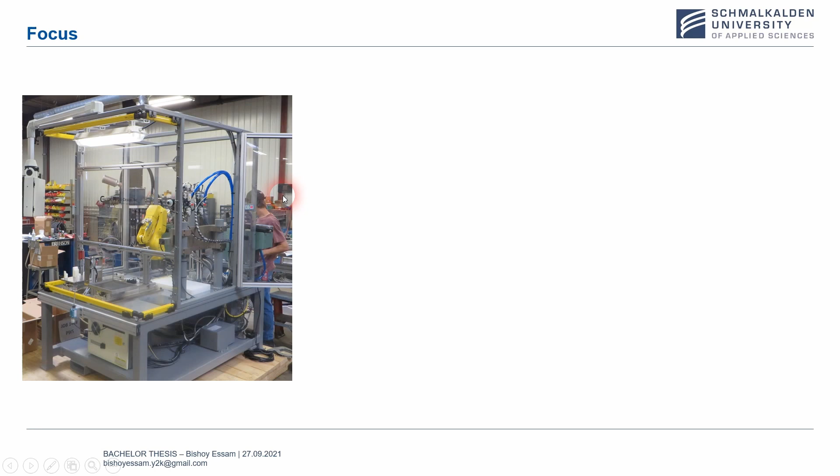To begin, I would like to discuss the focus of this thesis, which tries to solve the problems we see in this picture, where in most typical industrial environments we have a robot isolated in a cage away from the human worker, with no cooperation between the two. The aim of the thesis is to enable human-robot collaboration, and of course not just collaboration but safe collaboration. This is the desired situation we see here, where the human worker collaborates with the robot in a certain task.

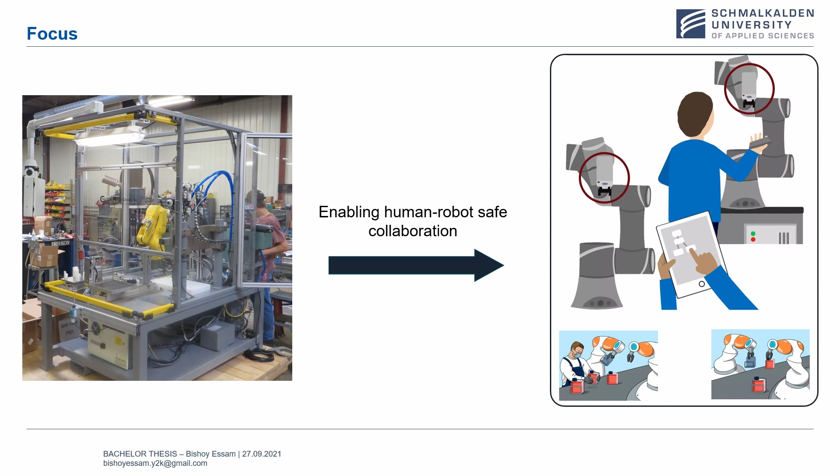Usually this task requires the flexibility and creativity of the human worker, and at the same time the precision and repeatability of the robot. We can see here the robot uses these cameras in order to perceive its environment and locate the human and so on. The big challenge that usually lies in this situation is the control problem.

If we imagine we are using a classic controller, this controller can be a PID controller, for example, where we have a reference here and an error signal, and the classic controller tries to drive the robot towards this reference via this control input.

We can see that this classic controller does its job quite well until there is a human in the environment. So if we have a human in the environment, the robot can collide with this human, and of course this is very dangerous when it comes to human-robot collaboration.

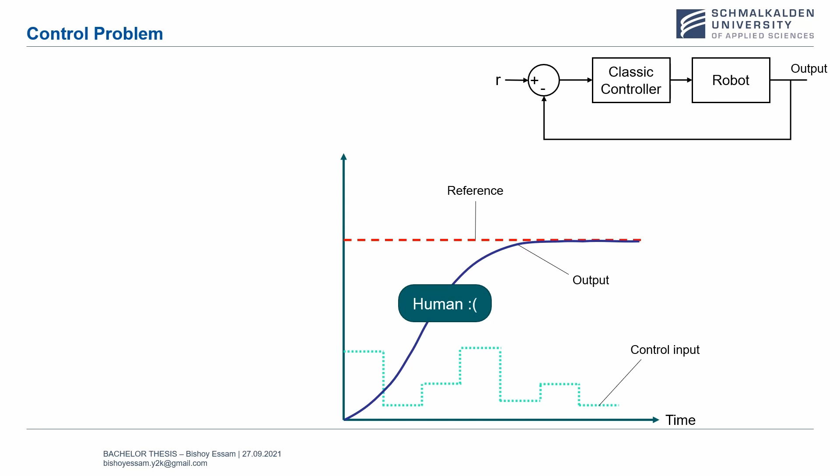We would like to have a desired controller that does the following: at a certain moment in the present, it can plan the path for the robot in the future, so that this robot can follow this path and avoid the human, and at the same time reach its reference at the end.

So the desired controller, using image processing and the desired reference, would plan the path for the robot, and at the same time plan the control input in the future that will achieve this path in order to avoid the human and reach the reference.

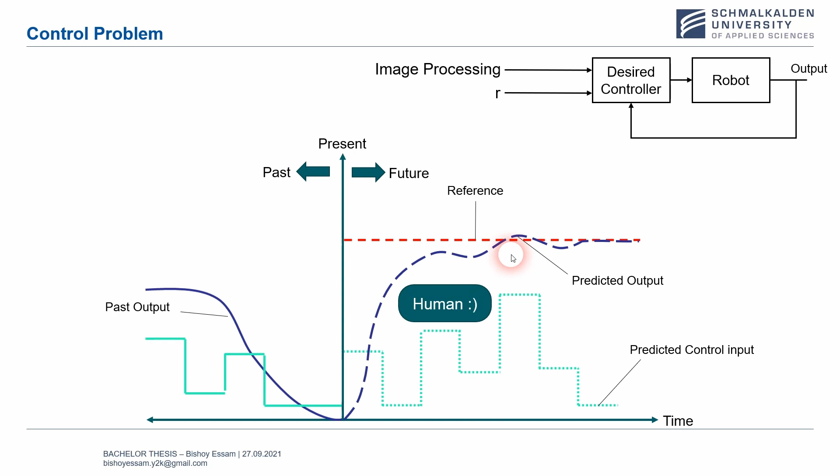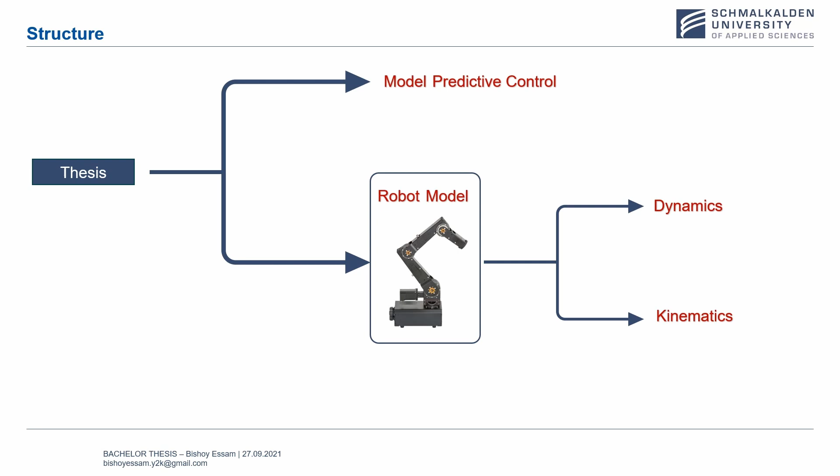And actually this controller exists, and it's called Model Predictive Control. But as you see from the name, this controller uses the model of the system in order to achieve its job. So first we have to formalize a complete robot model in order to be used by the Model Predictive Control. A complete robot model consists of a dynamic model and a kinematic model, and the kinematic model consists of forward kinematics and inverse kinematics. I would like to discuss with you more deeply the forward kinematics.

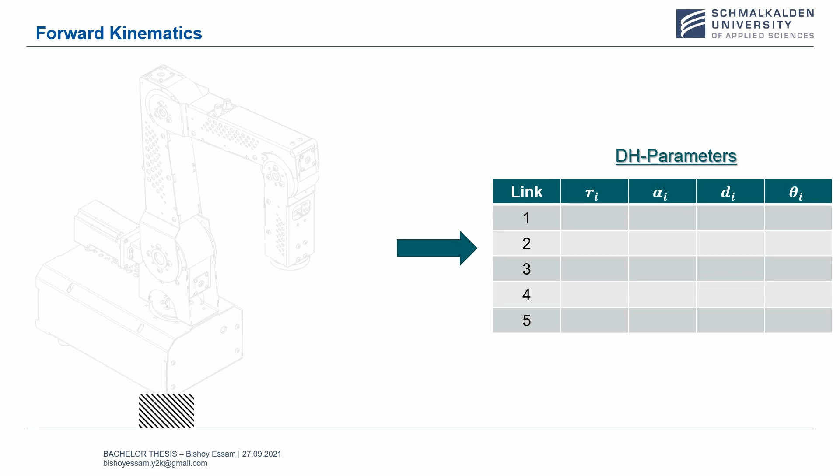This is our IGUS robot that is present in the robotics lab at the university. This robot has 5 degrees of freedom, meaning it has 5 joints, and these joints are structured in the following way.

The forward kinematics answers the following question: knowing the angle of each of the 5 joints, what is the position of the end effector in the Cartesian space? By Cartesian space I mean x, y, and z coordinates, because the end effector has these 3 coordinates. But how do we obtain this position in Cartesian space, knowing the angle of each joint, and also not only the position of the end effector but also its orientation, because the robot can achieve the same position in space but with different configurations.

So this resembles the orientation, and forward kinematics typically answers this question.

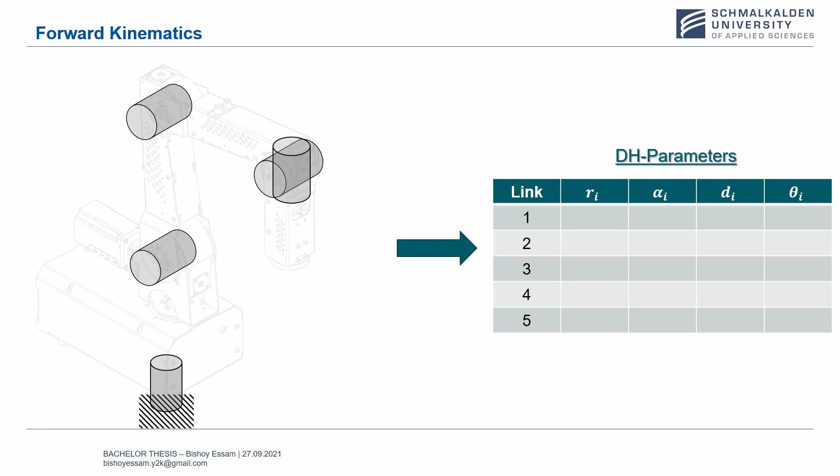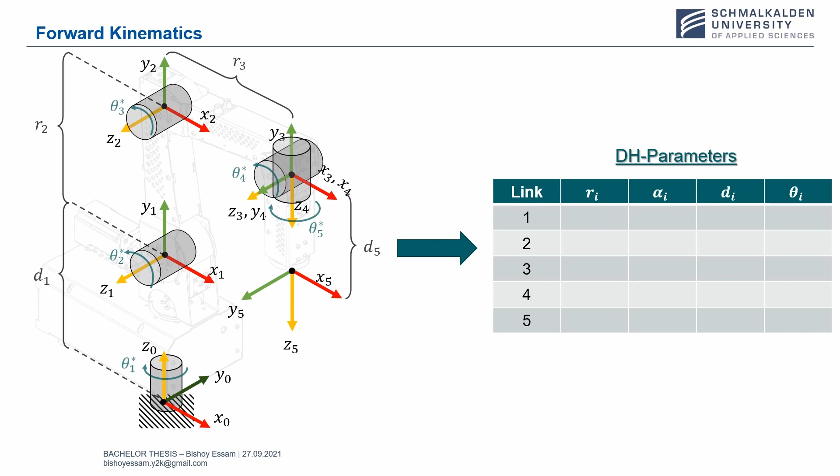Forward kinematics is obtained by following a systematic way called the DH convention, or Denavit-Hartenberg convention. This systematic way starts by constructing coordinate frames at each of the joints. So these are my coordinate frames. After that, we have to obtain what's so-called the DH parameters, and these parameters are typically the geometric relation between each of two successive coordinate frames.

In order to illustrate the meaning of these parameters, let's focus on link 1. Here is my link 1 that starts from the joint, from coordinate frame 0 to coordinate frame 1, and we have coordinate frame 1 attached to link 1, but frame 0 is not attached to link 1 because it is attached to the base, so it is the inertial frame.

Let's begin by looking at the R parameter. R1 is for link 1, and R1 is the distance between Z0 and Z1 along the x0 axis. You can see here that Z1 and Z0 lie in the same plane, so there is no offset in the x0 direction, and that's why R1 is equal to 0.

The next parameter is alpha1, and alpha1 is the angular distance between Z1 and Z0 along the x0 axis. We can see here that Z1 can be obtained from Z0 by a 90-degree rotation about the x0 direction. That's why here we have alpha1 equal to pi over 2.

D1 is the distance between x1 and x0 along the Z0 axis, and this distance is basically the link length. And finally, the last parameter is theta1, and theta1 is the angular distance between x1 and x0 along the Z0 axis.

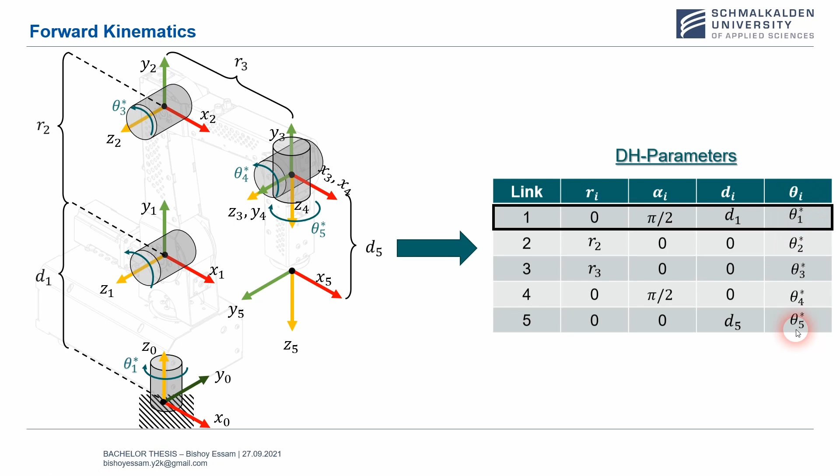Once we have the DH parameters, we can construct what's called the homogeneous transformation. The homogeneous transformation AI is a transformation matrix that relates frame I with frame I minus 1. Here the C and the S denote cosine and sine, so C theta is cosine theta, and S theta is sine theta, and so on.

We can see that this matrix is a function of the DH parameters of link I, so the matrix AI is a function of Ri, alpha I, Di, and theta I. Due to the fact that theta I is not constant, it is a joint variable, this matrix changes by changing theta I, so it is a function of the joint variable.

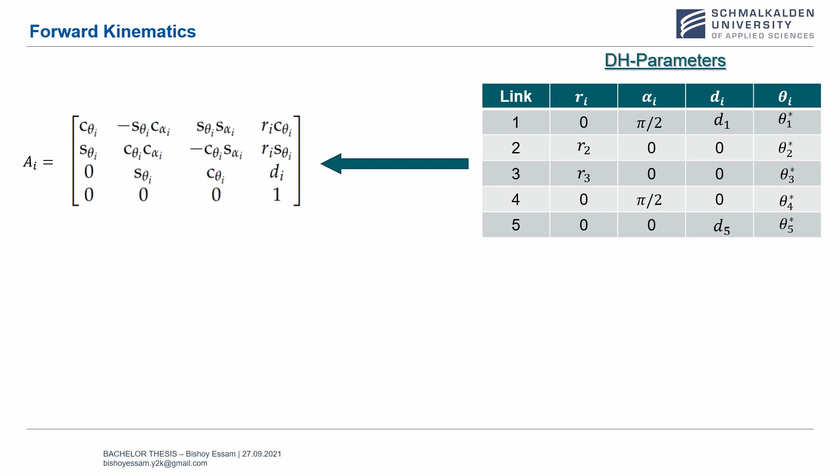After constructing the transformation matrix for each link, we multiply these transformation matrices by each other to obtain the final transformation matrix that relates the end effector position and orientation to frame 0, which is the inertial frame.

Generally, any transformation matrix is an augmentation between two parts. The first part is this 3x1 vector, and this is the position of the end effector in the case of the final transformation matrix. So this is the x coordinate, this is the y coordinate, and this is the z coordinate of the end effector.

Again, the C and the S are for cosine and sine. For example, C23 is cosine of theta 2 plus theta 3.

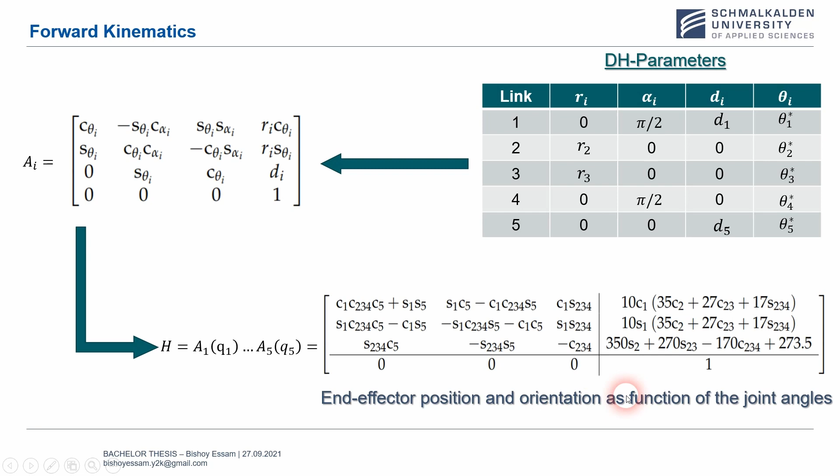The other augmented part is this 3x3 matrix, and this denotes the orientation of the end effector with respect to the inertial frame. We can also see that it is a function of the joint variables, because each of theta 1, theta 2, theta 3, theta 4, and theta 5 are not constant. They change by changing the joint's angle, so this final matrix is a function of the joint variables.

So by that we finish the forward kinematics, and the other part of the kinematic model is the inverse kinematics.

And the inverse kinematics does quite the opposite, which is knowing or having a desired orientation and position of the end effector. We would like to know the angular position of each of the joints that would achieve this desired position and orientation of the end effector.

By formulating the forward kinematics and the inverse kinematics, we are done with the kinematic model. And by the way, there is also a kinematic model for the velocity of the end effector, where we address the same question but for the velocity in this case.

So for example, the forward kinematic model for the velocity of the end effector is the following: if I know the velocity of each of the joints, what is the velocity of the end effector in the Cartesian space? This is the kinematic part, and the dynamic part is concerned about obtaining the differential equation of the robot that governs its motion in response to external torques and forces.

For the time duration of this presentation, I think it's enough talking about the robot model. If you have any question, of course you can email me regarding any question about the illustrated part of the forward kinematics, or if you would like to know more about the dynamics or the inverse kinematics. And now I think it's better to talk more about the model predictive control.

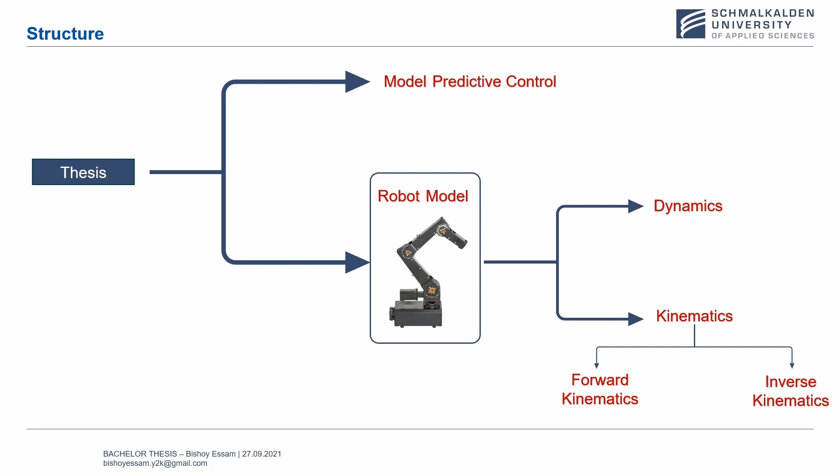So let's imagine we have the following control problem, where we have an initial position for the robot and a desired position of the robot, and we need our model predictive control to plan the path and guide the robot along this path, and at the same time avoid any obstacles that lie along this path. This obstacle can be an object, or it can be the human in our situation.

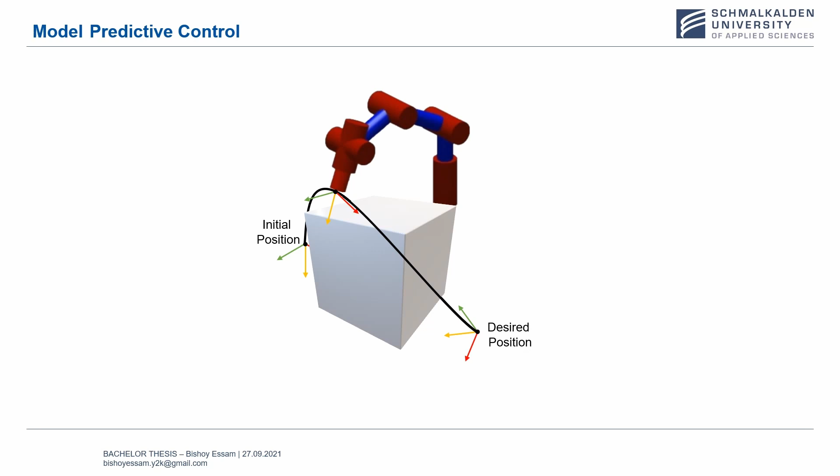As I said, the model predictive control uses this dynamic model in order to predict the future behavior of these states, and this future behavior depends on the predicted control input in the future. So by choosing different control inputs, we would have different future behaviors. So how does the model predictive control choose the right control input in order to derive a correct output for the system?

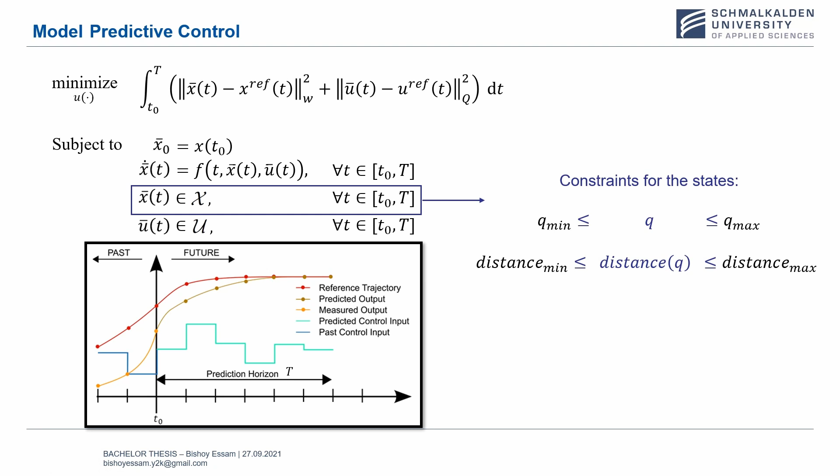And also we can have constraints over the inputs, and in this case the inputs are the torques, and we can have a constraint over the torques in order to lie within a minimum and the maximum value.

So the big picture of how model predictive control works is that at the current instant, at t0, the model predictive control tries to choose an optimized input trajectory in the future that minimizes a cost function, and at the same time the predicted output resulting from this control input should follow certain constraints defined by the user, and the control input also follows a set of constraints.

After achieving this calculation, the model predictive control applies only the following control input to the plant. This control input is applied, and then the whole calculation is repeated again in the following sampling time. Of course the prediction is achieved for a finite amount of time called the prediction horizon, because the MPC cannot predict the future of the system for an infinite amount of time.

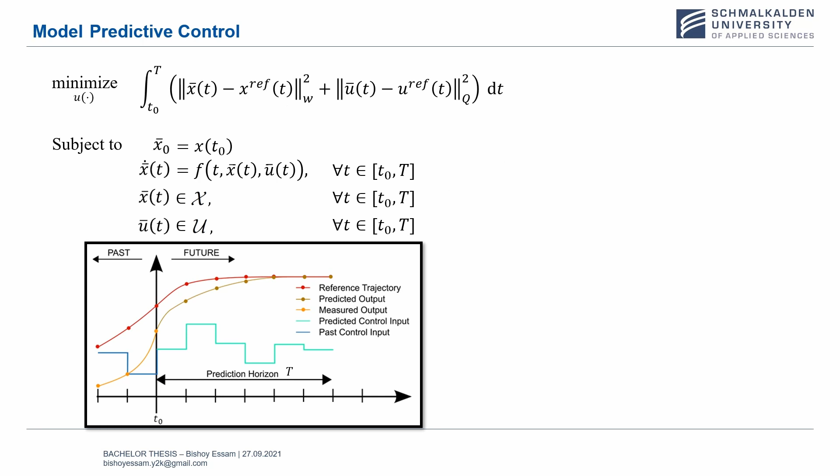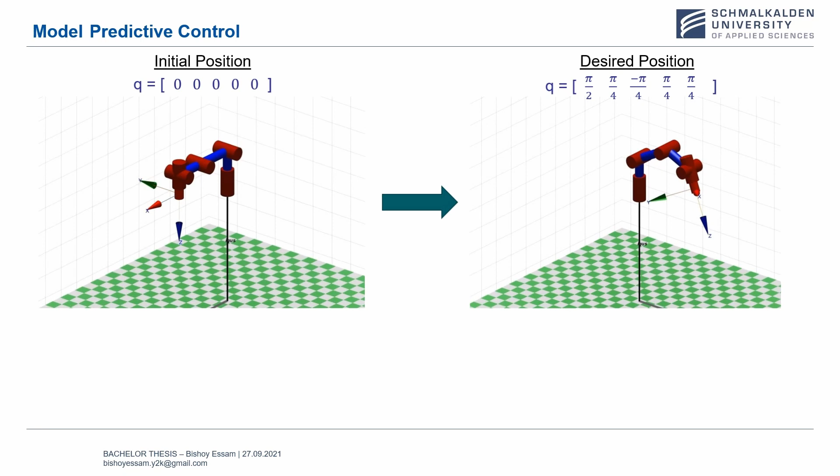I would like to show you the behavior of the model predictive control in the following example. Here we have the initial position of the robot, defined by 0 angles, and the desired position is defined by these angles for each joint. I would like to focus on the results of the MPC regarding the fifth joint. This joint has an initial position at 0 and a desired position at pi/4, shown here in this graph.

So this is pi/4, this is the output, and this is the control input. You can see here that the model predictive control successfully drives the fifth joint towards its reference value.

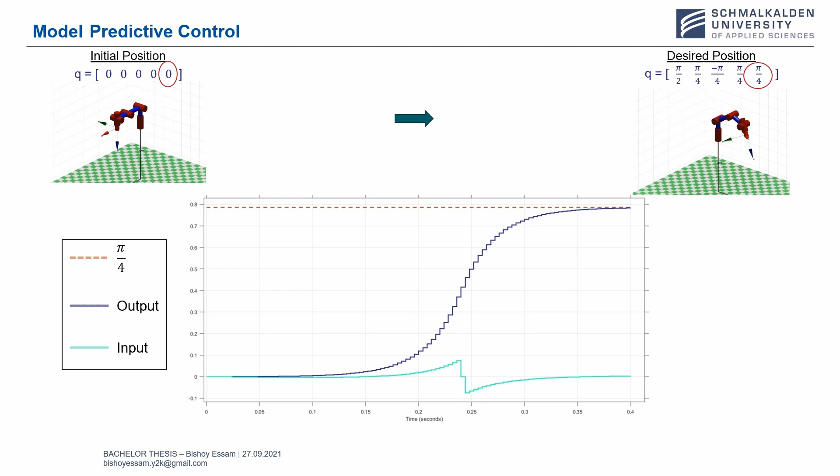I would like to focus in particular on this area, where we can see that the control input, which is the torque in our case, is increasing as we advance in time, but nearly midway between the 0 position and the reference, the torque suddenly changes from positive to negative, although the joint has not reached its reference yet. This is because of the prediction in the model predictive control: it knows the system is approaching its reference, so it tries to decelerate the system in order to prevent overshoot.

So to sum up, model predictive control is used together with image processing to achieve the desired situation we had at the beginning of the presentation, where human and robot collaboration is achieved. Here, the model predictive control is like the brain of the robot, and image processing is like its eyes.

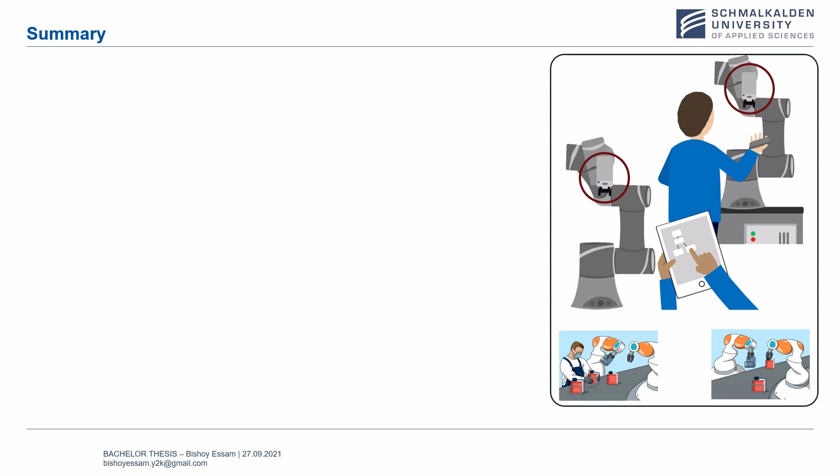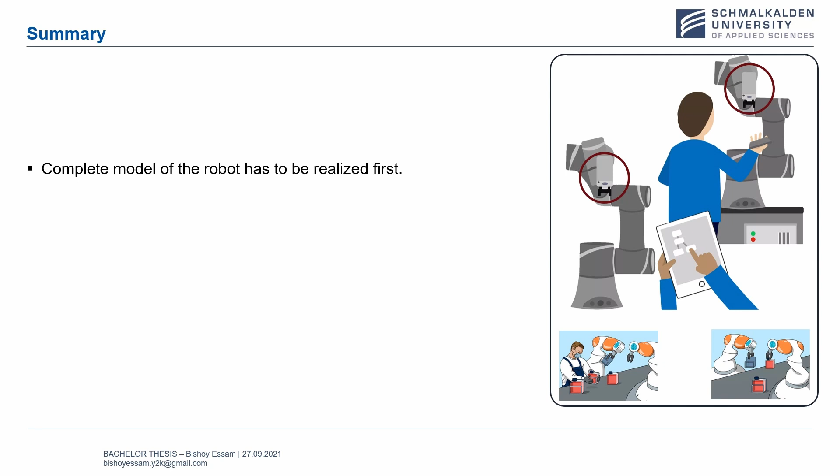But first, before tackling the model predictive control, we had to realize a complete model of the robot to be used by the MPC. Then the model predictive control can exploit this robot model to predict and optimize the behavior of the robot under certain restrictions.

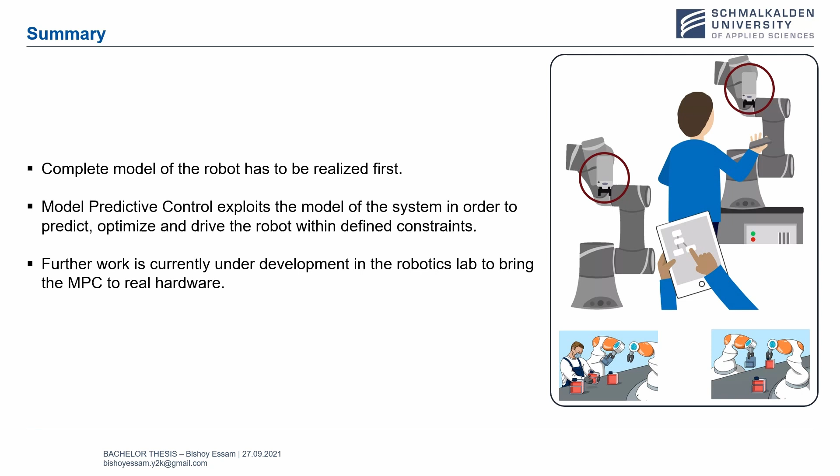It's also important to note that there is work currently being done by my colleagues at the robotics lab, involving image processing and also, for example, installing encoders at the joints of the igus robot in order to have feedback. This work is currently under development in order to bring the MPC, or model predictive control, onto real hardware.